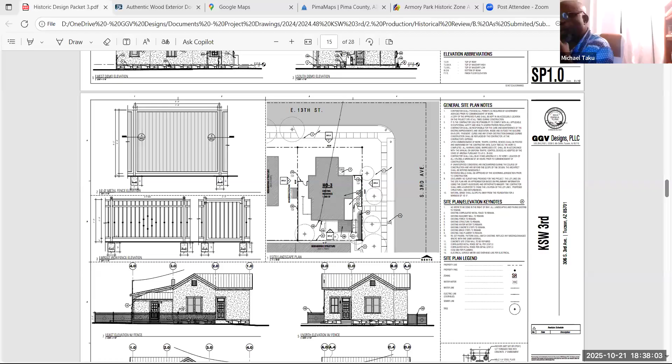You should be able to share your screen now, Jose. Let me see, okay, can everyone see my screen? It's coming. So I'd like to present myself again. My name is Jose Curtis. We will be presenting this project here on 306 South 3rd Avenue.

In our first review, the major things we had proposed, the major repairs involved a stucco retexture of the exterior. This is something we ran through Vint and Associates, and we received a stucco report from them. We also are planning on demolishing the asphalt shingles currently existing on this roof, and we're going to be replacing this with a standing seam metal roof.

We will be repairing and replacing doors and windows. We are replacing a chain fence. We're going to remove a dead tree that is at the back of the property.

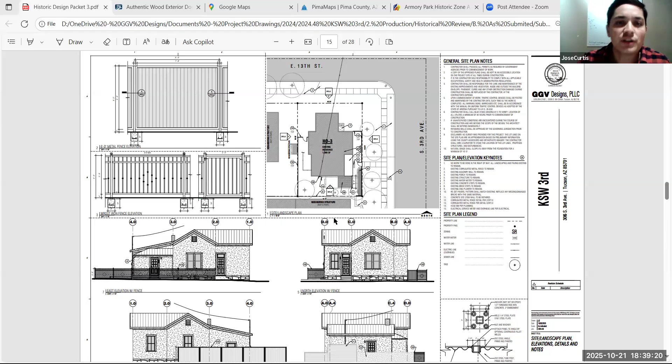All right, I'll continue. So we're repairing and replacing windows and doors. We're going to replace an existing chain link fence surrounding the property. And we're demolishing a non-conforming structure to the west of the property, to the southwest. So these are the major repairs.

As far as minor repairs, we're going to be adding a condensing unit to the back of the house, which will be the main cooling for the house. This will be behind a fence we're also proposing, which I'll touch on later. We're demolishing an existing water heater on the back of the property, along with some non-traditional electrical conduits. I think they were done after and aren't recorded anywhere, so we're going to be demolishing those.

It's currently in the works, but we're proposing to relocate the electrical service entrance. Right now it's to the east, on 3rd Ave. It's kind of entirely up to TEP, but we're going to be in contact with them to try and relocate that service to the back of the house.

The purpose of this meeting, as a continuation of the first, is to address some of the issues from the previous meeting. One of those major issues was the roof, so we're going to be replacing the existing shingles with a standing seam metal roof. We hadn't spec'd anything out previously.

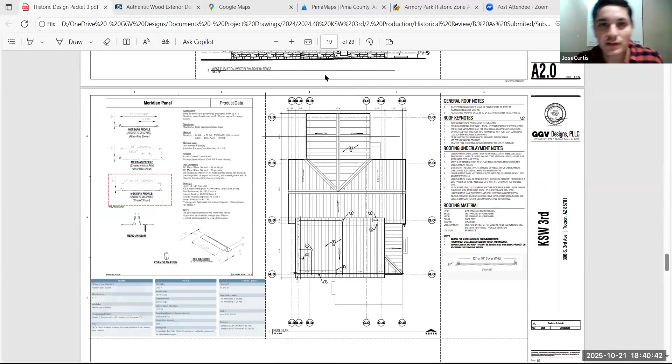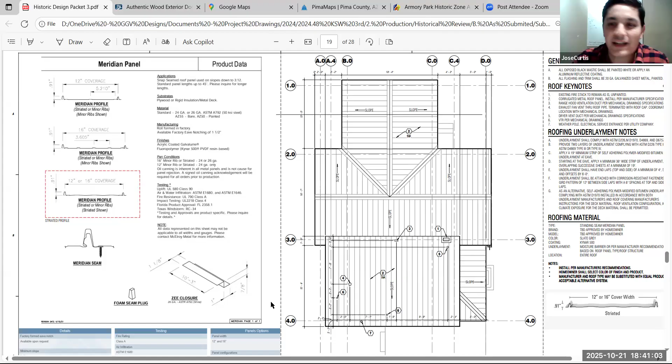Here in the spec, what we're spec'ing out is what we're calling a Meridian panel, acquired from McElroy Metal. One of the major concerns with the profile was that it shouldn't look commercial. So I drove around the neighborhood, and based on what I found, this is the style of roof - the striated panel.

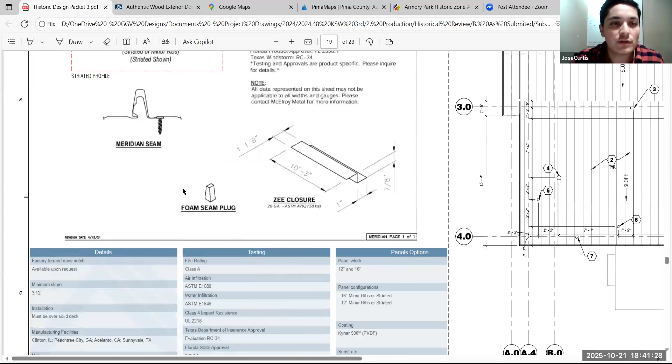So there's no ribs, the only thing giving this structure are the seams. Meridian does provide some with ribs, as you can see here, minor ribs, but we're not choosing that one. We're showing the striated.

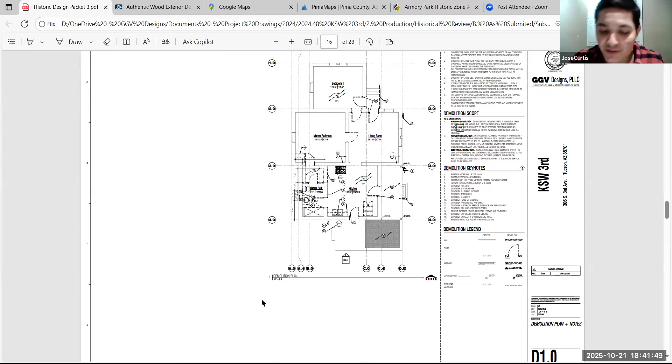Another major repair that was an issue before was the fence. The height we had used prior to this was in violation, so that fence was also going to be a violation. The fence we're proposing here will be on the north, east, and a small portion of the south. It's going to be a wrought iron fence, 4 feet high. A concern previously was that the corrugated metal fence we had proposed is not see-through on the street fronts, so we shifted to a more conventional wrought iron fence.

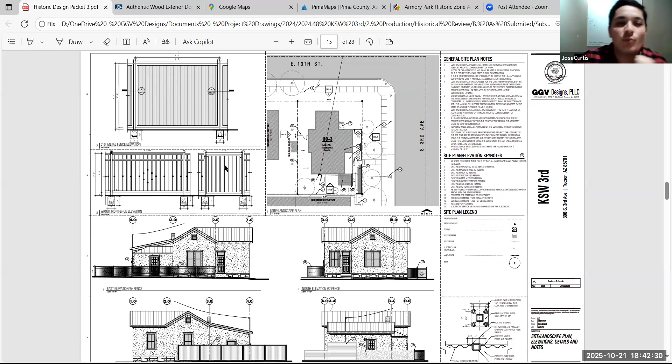As far as color goes, that's to be determined from the owner, but it might be a dark bronze. On the west end of the property, we're going to be doing a corrugated metal fence just for privacy. One comment we received was that we had the corrugations running horizontally, so we've changed that to be a vertical corrugated metal fence on a metal frame.

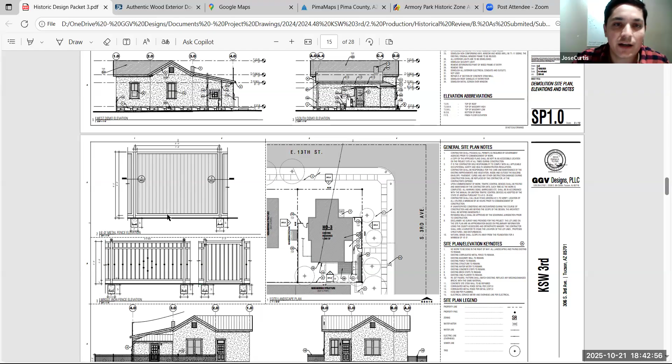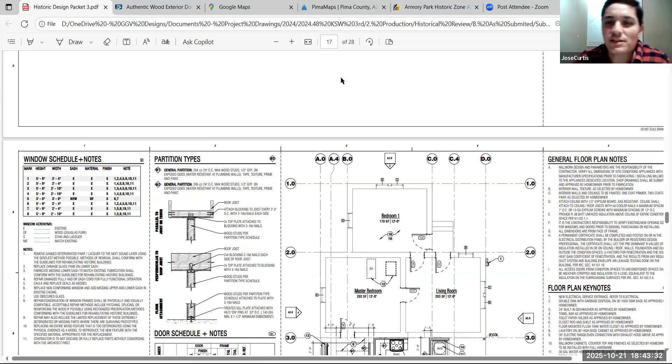Another issue we had prior was exactly how we were planning on restoring and/or replacing any windows. We didn't have much of a plan before. What we think is best is we're currently in the process of choosing a contractor that will be doing the renovation of the windows and doors. Our plan is to walk the site with this contractor.

If the board would allow it or agree, somebody from this board could also walk the site with us, and we would see each individual window - what is to be replaced, what's to be restored, what's to be fully reconstructed.

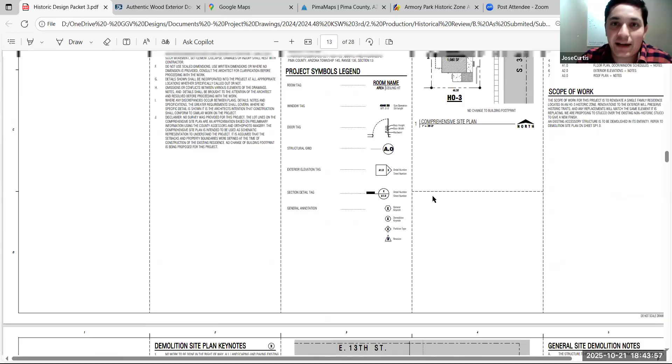The condition of these windows are pretty bad. I'll try and pull up some pictures. There's a lot of rot, a lot of things that probably won't be able to be salvaged.

But with help from the contractor and from the board, like this door back here, we can reconstruct a window sash and window frame, so that can be reviewed also prior to us doing any demolition of any of the windows.

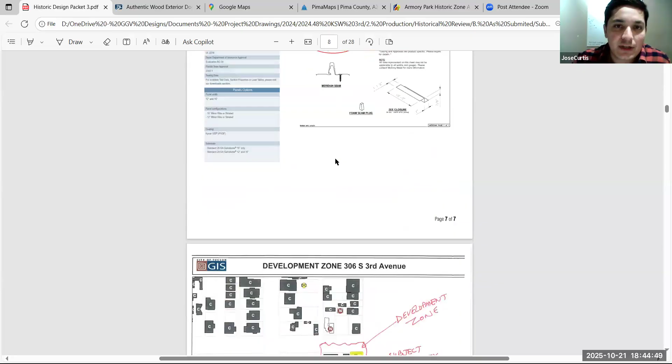The last thing I want to talk about was the doors. It was brought to our attention that these existing doors with the X panels are not traditional to the neighborhood. So we have proposed to demolish these and in their place have a more traditional door to the neighborhood, which I have called out here.

It is a JELD-WEN door, an authentic wood exterior JELD-WEN door, and it's something that I feel fits pretty well with the neighborhood.

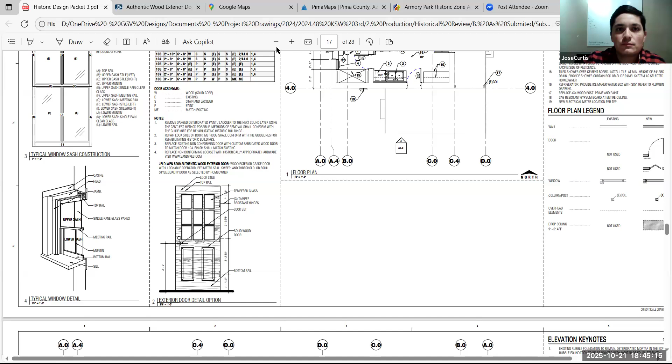That concludes my presentation. Thank you so much. Any questions and comments from the advisory board members?

Yes, I have a couple of questions. I think there's a little confusion on the doors and windows on the plan, but I think you clarified that in your statement, so I'll accept that in terms of what's being done. That basically indicates whether or not they're going to be restored or replaced.

When I went over to the site before the previous meeting, it appeared to me that a number of the doors and windows were in pretty bad shape and would be very difficult to restore. So I'm glad to hear that you're going to replace in kind if necessary. That remains to be taken care of.

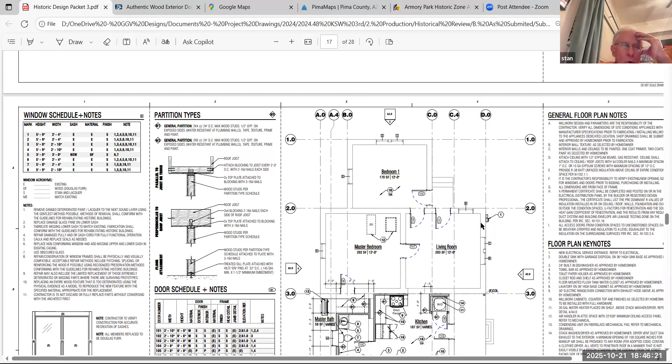On the window schedule on sheet A1.0, you show a 2/2 window. You've got both 1/1 and 2/2s, and on your new elevation plans, it appears that you're maintaining the window type in their original locations, whether single light 1/1 or 2/2 double hung. I think I'm happy with that, but your typical window sash detail shows a 2/2, implying that's going to be the standard window throughout.

But I'm assuming you'll maintain the single light 1/1 where it exists now, and the 2/2, as shown in the typical window sash, would be the window used where you've got a 2/2 window. Is that correct? Yes, that's correct.

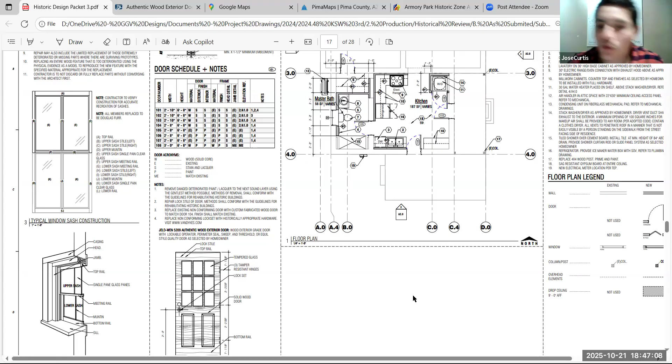That will be something that when we walk around, we will keep what is existing, if there is a 1/1 or a 2/2. The typical window detail we provided was meant to encompass both, so whether you'd do the 2/2 or 1/1, this detail applies to both. But you're correct, in our elevations we show it maintained as what is currently existing, and that's the plan.

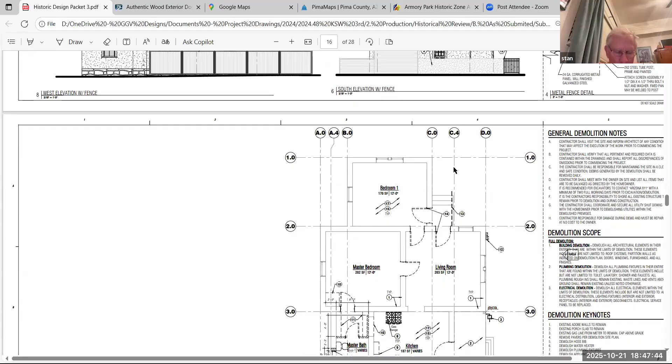Okay. And then on SP 2.0, south elevation, you're showing on the plans a corrugated fence that is in a horizontal position rather than a vertical position. Going through the drawing, just to the left of the main door, I'm assuming that's a corrugated fence, but it's horizontal rather than vertical.

Will that be vertical? This corrugated fence on note one here, this is existing. That's something the owner of the adjacent property put up sometime, we don't know when. But it is existing, so what we're showing is how it is out there right now. Okay, that isn't existing?

Is it on your property? It's right on the property line, so we're kind of in between on how to tackle it. But I think ultimately, as we now show it existing, whether we demolish it and redo it might be up to you guys. We're proposing to leave it existing.

All right. Well, if it's existing, I don't know that we can do much about that, but I did notice it was horizontal rather than vertical. And then you're also calling out for a mill finished galvanized steel for the corrugated. I know galvanized steel is used in different locations around the neighborhood. My preference would be a cold rolled steel, which naturally rusts and gives a warmer feeling, but I'll leave that to the rest of the board members. I would have that changed, but we can discuss that.

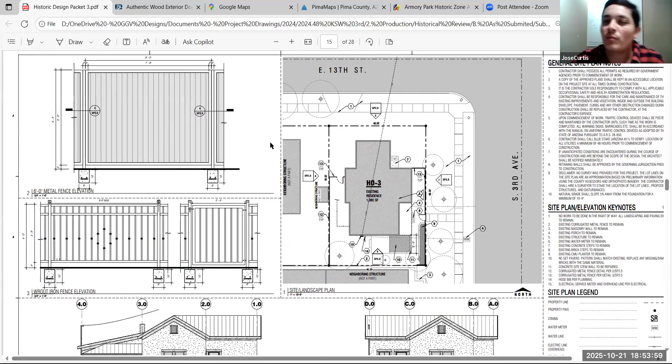Yes, so we chose the galvanized steel. We think that's easier to paint. And I think I did miss that point, but we will be painting this. And it will be the same color as the wrought iron fence, probably about a dark bronze. So there, it won't be reflective at all.

Okay, excellent. Then the second point is the detail of the posts that don't show the concrete coming to the surface, but just below the surface with a little bit of soil, decomposed granite, or other material to cover. Do you have a sense about that?

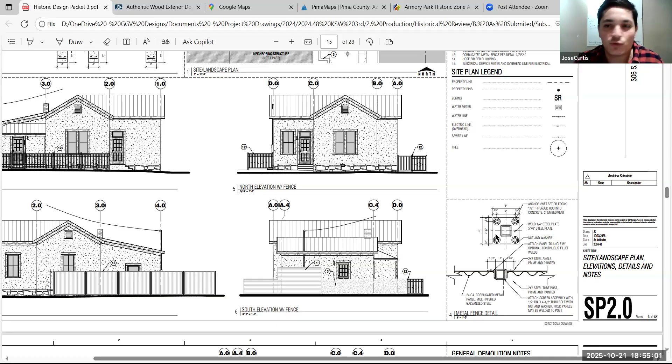Yeah, I'd like to give my piece on that. The reason we go typically on fences in this style, it's a lot easier for construction. When you set the posts in the concrete, what you essentially do is I think it becomes a custom fence that you have to build on site because the posts might not set perfectly at a 90-degree angle. And so I think as far as for what our client would like, it's a lot easier to fabricate the fence at a shop and then have it trucked or shipped and then do the anchor bolts than to have to fabricate it on site when you cold pour the post into the concrete. That's our take on it.

But we're willing to go with the second option. Could I comment on that? Yeah, I mean, sure. If you're fabricating them in the shop, that means that your post and your horizontals and your verticals are all welded together and they're ready to drop into place. So if you fabricate a fence, you can fabricate it in individual pieces or the entire length if you wanted to, bring it on the site, dig a hole after you got them on the site, and then just drop them in, pour the concrete, and you're done. That would work also. We could do that.

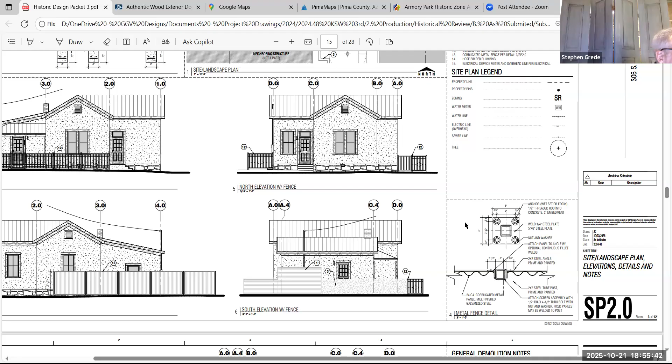So I'm also noticing that in detail 3, wrought iron fence elevation, the indication is that the concrete is below grade in that detail. Yes. Okay, so I think that how it is installed is less important than that you don't have all the concrete visible at the base of each post. Would you agree with that, Stan? Sure, you're right.

I missed that on the detail, which does actually show that the concrete is below finished grade. So if they want to do that, that's fine too.

Excellent, so then the last question is about the doors. Right now you have a 9-light door with an X panel, and what you're proposing is a 9-light with a 2-panel below. And again, it's a replacement door, so it doesn't have to match, since it's replacing something that's not a historic door currently.

I'm not sure whether the 2-panel or the 3-panel matters more—Stan, please clarify if you feel the 3-panel below is very important, or if it's the fact that instead of a 9-light, a single pane would be more historically appropriate. I know what we said last time was the 3-panel below, but do you have a sense of what would be most important to change?

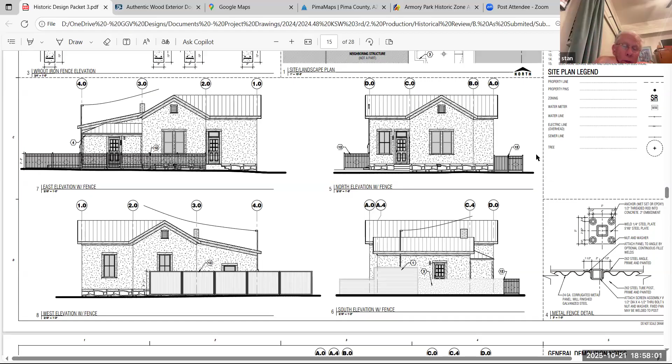I'm just looking at other doors in the neighborhood—a single light, or even a split light with 2 vertical panels, is something we have in the neighborhood in houses of that time. So Jose, have you been able to find any historic photos of the house that would indicate what doors were there historically? I have not.

The doors that exist there have been on as long as I can see—that's this one right here with the X panel. The reason I went with the door I chose was that just north of this property on Third Avenue, I found a building with a very similar door. Not exactly the same—it might exactly be a Jeld-Wen. That's why I went with that door.

But Jeld-Wen also makes a single light with a horizontal lower panel, so it's something that's very easily changed on the plan. This is just why I decided to go this route.

That makes perfect sense. So I think the Jeld-Wen has the 2-panel below—I don't think they have a 3 horizontal panel configuration, do they? I think they have a 2-panel and a single panel below. Okay.

Stan, do you have strong feelings about that? You know, I wouldn't strongly object to using the door he's got shown. I just felt a more appropriate door would have been the single smaller light with a 3-panel horizontal door. I find it hard to believe that's not something relatively standard—I'd think even Home Depot or Lowe's might have something like that. But I'm not going to make a stand on it. If the rest of the members are satisfied with that door, I'm willing to go with it.

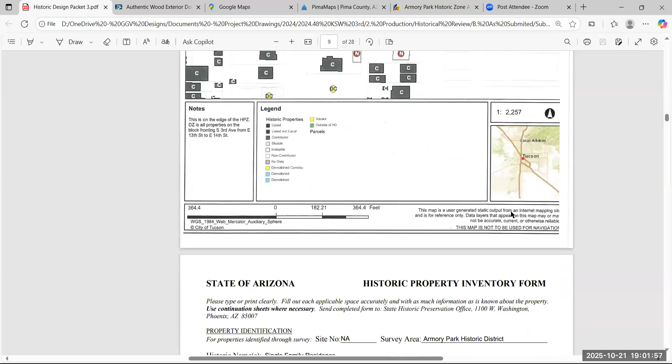Jose, I'm confused about the attic vents. On both sets of plans, it says the attic vents are to be demolished and then refinished. Can you explain what's going on with the 3 or 4 attic vents? So we're taking the same approach as the windows - some are rotted out. We're planning on replacing them in kind, repairing when we can, replacing if necessary. They're going to look the exact same after we're done - we'll take measurements and match it exactly.

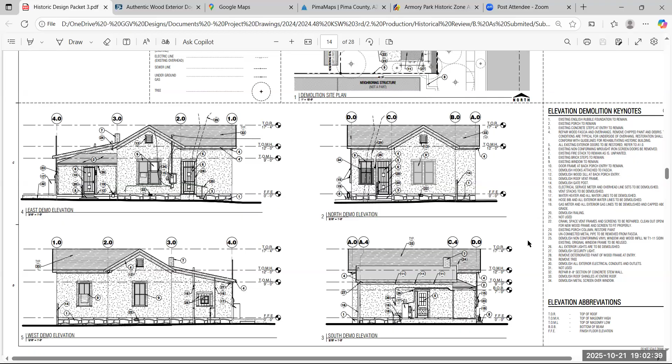The plans we got show a gas stove, but the gas meter is being removed. Then the page I caught for a half second shows an electric stove. What's the situation with the gas - is it going away? It had an existing gas line and it is going away, so everything's electric.

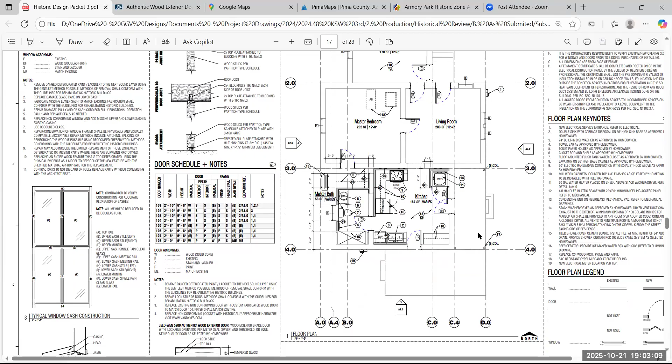I looked into the Meridian roof panels - they're made by McElroy Metals, and I'm surprised you were able to get them since there's no distributors in Arizona. But they do have painted versions and flat panel versions. The one I think you're indicating has some striation, but it's not that bad. The 12-inch would be more in keeping with the era of the building than the 16-inch. It's also a fairly complicated roof with multiple gables, so the smaller detail would look better. I thought the same.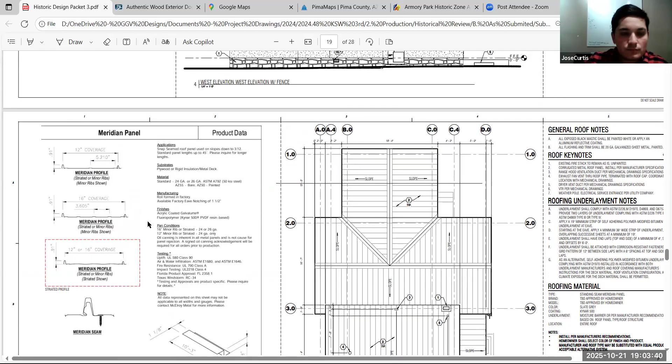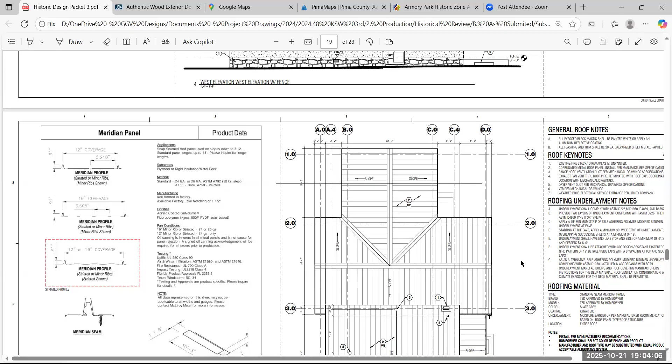You might want to go for their Kynar paint because it gives you a 40-year warranty instead of the 25-year Galvalume that just seasons with oil. Typically we approve matte or naturally rusting metals rather than shiny, whether it's corrugated or roofing. Again, I apologize for missing that, like on the fence, but we're planning on painting this as well. Color is to be determined, so it won't be shiny.

Okay, so I think that's it for me. If there are no other comments or questions, then perhaps a motion.

I guess I could make a motion if there's no comments, but before that, I would withdraw my requirement for the cold rolled steel rather than galvanized, so long as it's painted. But I would like you to note on the drawings that the tubular fence and the corrugated fence will be painted, and provide that color. You can make that a condition in the motion if you wish.

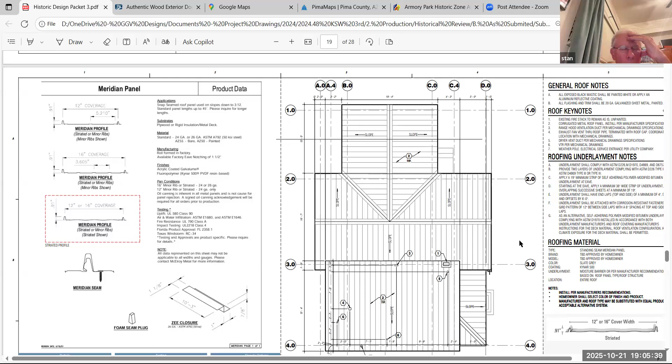I make a motion that the plans be approved as submitted with the understanding that the exposed fence will be painted, and that the exterior doors - our preference is a single light with a double or triple panel if it can be horizontal, but we would accept a double panel on those exterior doors. I think everything else was fairly well explained and accepted after Jose's explanation, so those would be the only two conditions I'd have.

Thank you, Stan. Do you have a second? I would second the motion. Marie seconds. Okay, any other discussion?

Then I'm going to call the vote. Helen Erickson - oh, I'm sorry, John Burr, you have your hand up, so you do have a question. Just a quickie - do you need to add a minor review to look at the actual windows on site? I think that was part of the proposal, and as soon as we're done with this, we can recommend who might be able to do that, Stan. Fine, I just didn't want to miss that.

Okay, so Helen Erickson has an aye. Maurice Roberts, aye. Stan Schuman, aye. Lynn Sutherland, aye. Steve Grede, aye.

So now that the motion has passed, we're looking for Stan - you traditionally do minor reviews. Would you be available to meet with Jose on site to look at the windows? Yes. Okay, thank you so much.

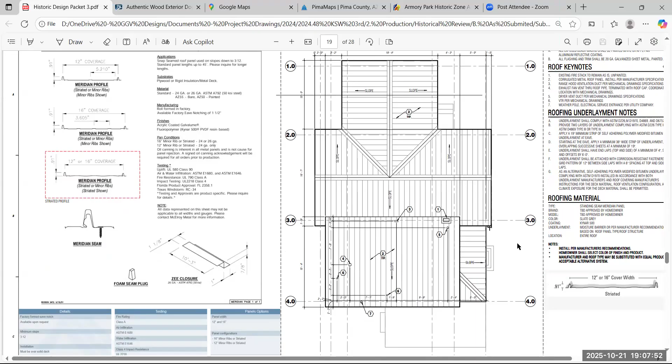Where's Gabe? He couldn't be here right now, he had an event. Okay, well say hi from us. All right, I will, and let him know we weren't hard on him.

I'll tell him you guys were hard on me, just so he might feel sorry for me. He'll rewatch this video, he told me, to see how I did. Well, you did very well.

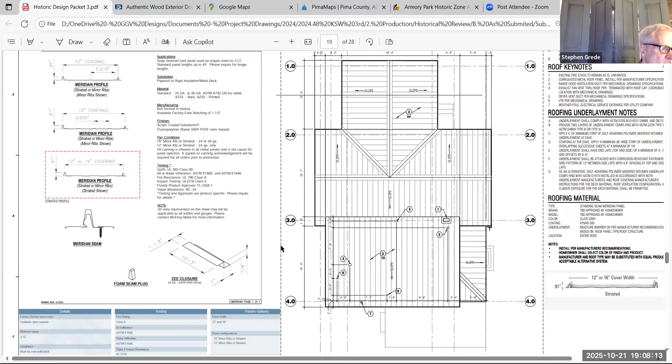Thank you. Okay, so I'd like to move on to the next item. SD-1025-00156, 702 South 3rd Avenue, construction of a new 446 square foot detached garage in the rear of the yard.

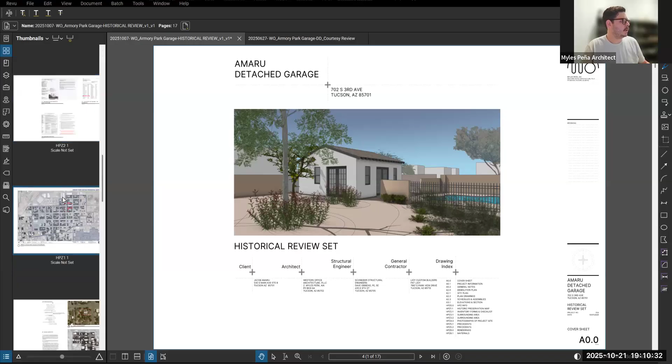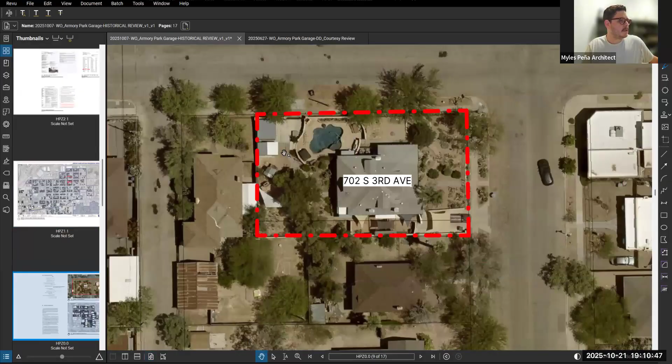So within the Armory Park Historic Residential District, we're here on South 3rd Avenue and 17th Street. The garage itself will be facing towards and fronting on 17th, not on 3rd. It's going in the back, kind of northwest corner of the property. You can see, just as a refresher, some of the existing structures that are in disrepair and going to be demolished in order to place this structure in. I think overall that'll be a nice improvement for the street.

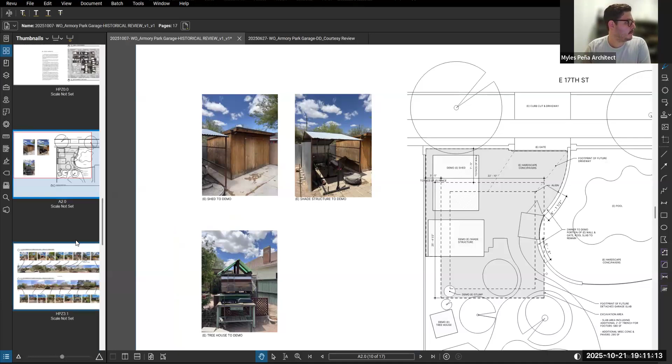Did a detailed study looking at the facades of the street frontages within the development zone, and presented those within the drawings here.

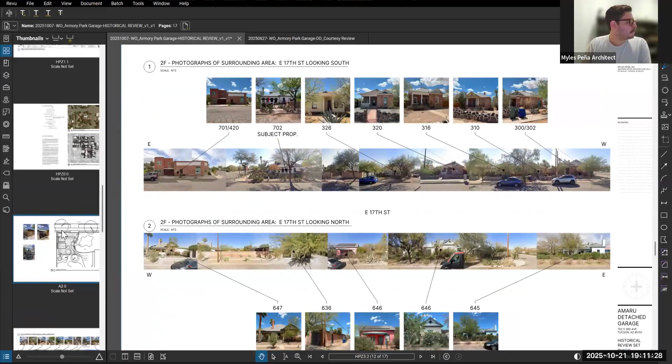So the changes since we last spoke - I missed in zoning that accessory structures like this need to be under 12 foot. It was 12.3 before; I did not get the comment, but when I was reviewing for another project I caught that and dropped it down that 3 inches.

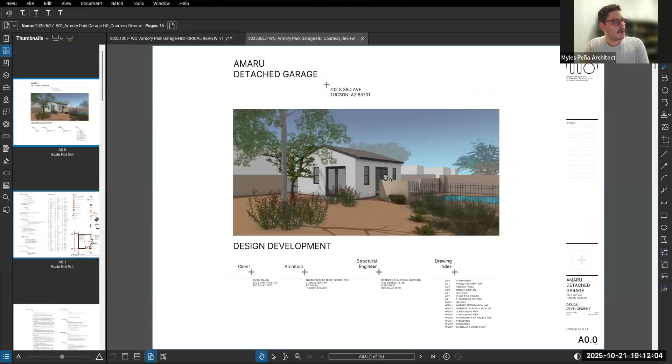The doors and windows have stayed in the same locations, but the main difference that has occurred was some discussion about the garage door and what that was meant to be like. In the previous iteration, the French doors here were just single light, and then there was a fairly minimal style steel door. The feedback was that maybe it was too dark to go with the white color to match the stucco, and looking around the neighborhood at what garage doors existed...

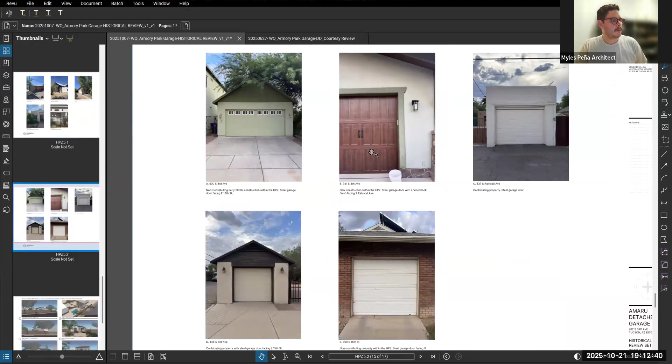Some of these are within the development zone, some outside of it. Other than historic existing wood doors, everything else is steel within the neighborhood. Even this newer project here on, or through, Railroad - you can see the garage door, but the address is 741 South 4th. It's a wood-look door, but that's still a steel door on that property.

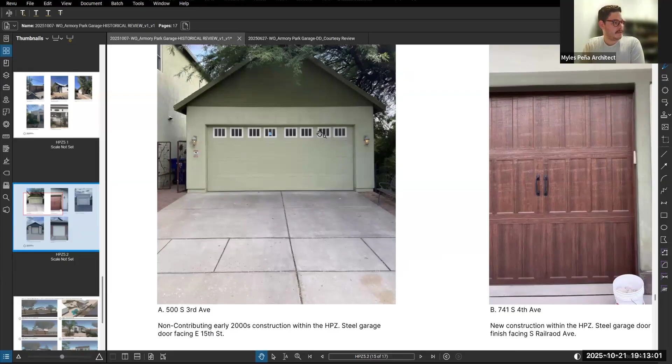And I ended up going with a model that was pretty similar to this newer construction on South Third, 500 South Third - a very similar type of panel breakdown that starts to mimic that look of wood a little bit, but would still remain steel in order to keep it operable by hand, as that's one aspect the owner does want.

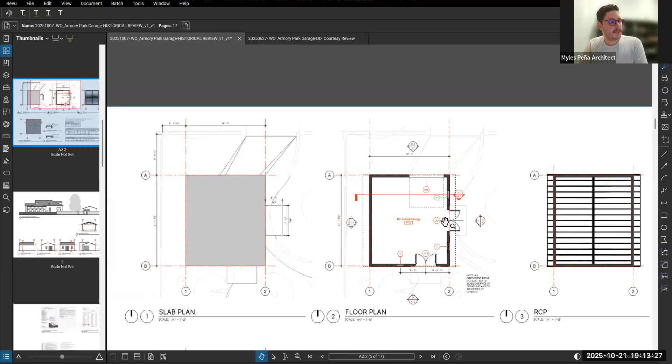The overall dimensions of everything else have remained the same - simple square footprint, 2 sets of French doors with the garage door that's offset, so it's about a 1.5 car garage. The main goal for this is to store the motorcycles he has on South Third Avenue - another improvement in terms of getting more vehicles off the street and having them within a private location here.

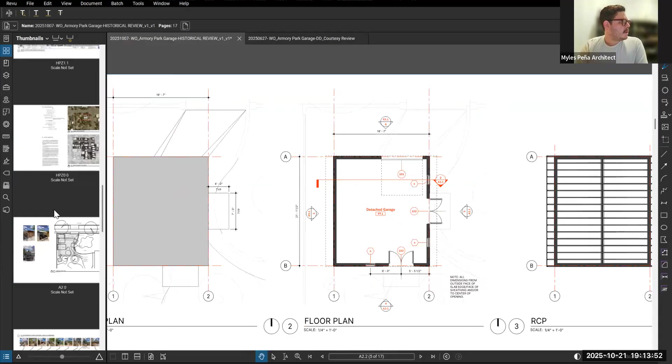The change that was hard to incorporate was moving away from the French doors. Being able to have that large opening to ventilate was a primary concern, especially because we're not adding any active or mechanical ventilation. There's a product under the eave that allows for ventilation that is not visible, and then a built-in ridge vent along the top ridge of the roof.

The suggestion was to consider a single door with 2 relights on the side. One issue is it goes from being about a $2,000 door to a $10,000 or $12,000 door. So the alternative would be to just go with a single door, but I think the design would suffer. Considering it's an accessory garage just meant to house motorcycles, the budget's not too large for custom sets of doors.

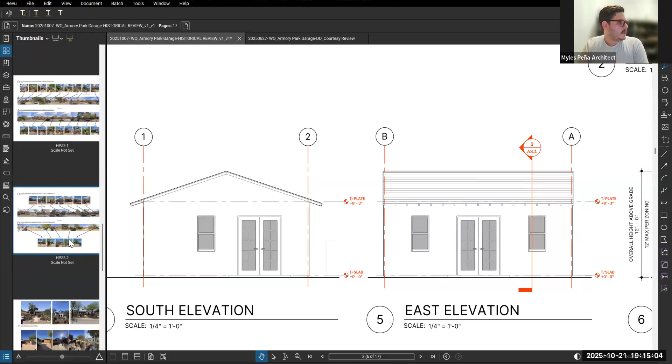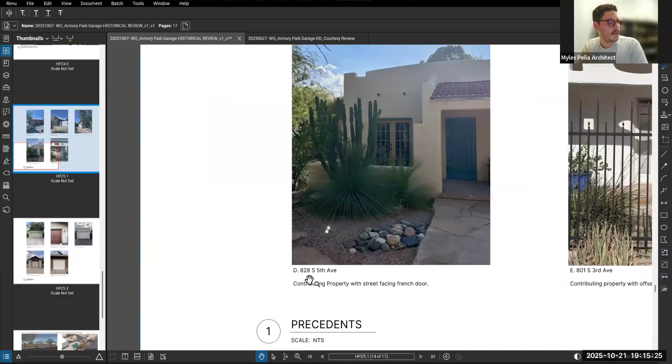In terms of precedents, there wasn't a ton, but there's some bad examples within the development zone. At 801 South Third, I'm assuming it's a narrower opening, but they have the split French door included there. I did see, outside the development zone but within Armory Park historic zone at 828 South 5th Avenue, an exterior street-facing French door.

So there is some precedent within the neighborhood for that. But I think largely the argument is that we don't want it to be confused for something historic, and none of those doors face towards the street front. So they're fairly private, and they'll be behind the existing wall that is there.

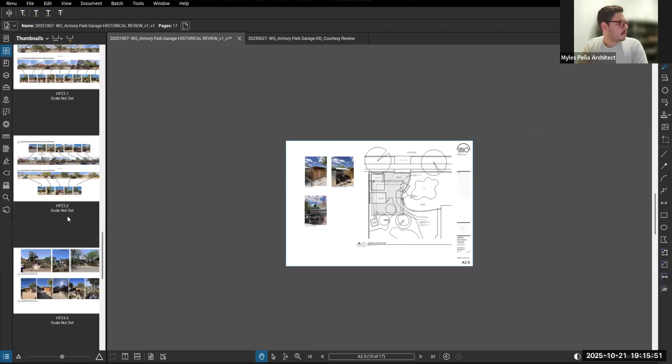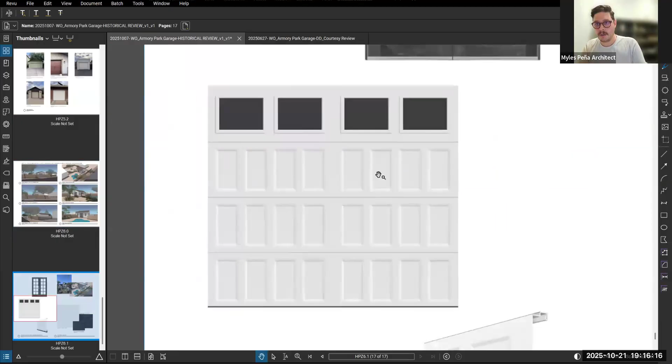If I can find that elevation again - so here you can see the updated renderings where the door is located. There's a little bit of a discrepancy between the renderings and the elevations, but it is a 10 light door that I found that is affordable for this project. And here is the elevation of that specific garage door. I thought both of these worked well.

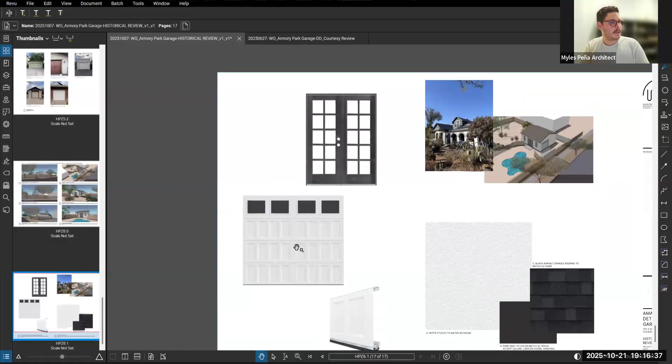The front doors on this house have a wood panel in the lower 4 portions, and then it's like a 6 light window above in the front door. Overall, I thought this approach to the garage door and the French doors did a good job of complementing the house and staying within the character of the neighborhood.

No other materials have changed. The stucco still matches the existing home, with an asphalt roof that matches the existing home.

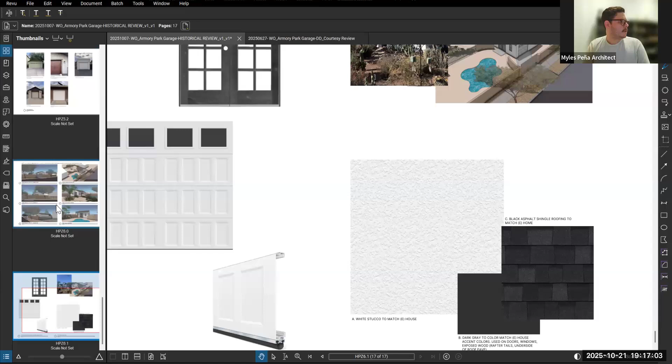Updated renderings - this is the existing wall and existing gate. This is the view. It's kind of a perforated metal gate that's there, so you do have some views from the street. This is an existing driveway and curb cut that's already there.

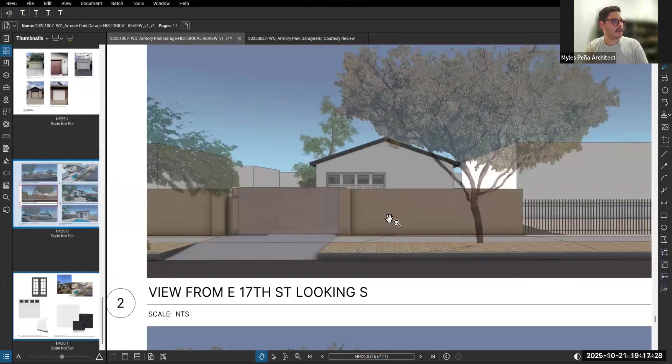You can see from the house, this is the view here, but from the street you predominantly see this elevation and about that much of the door. So I would argue that when you're passing by, whether it was a single door with the 2 sidelights that had mullions, or a double set of French doors, the visual is fairly comparable.

I was looking at it - if it was double the price for the doors, I think we would have been willing to move in that direction. But to spend the vast majority of the budget of this project on these 2 sets of doors was a big ask for us.

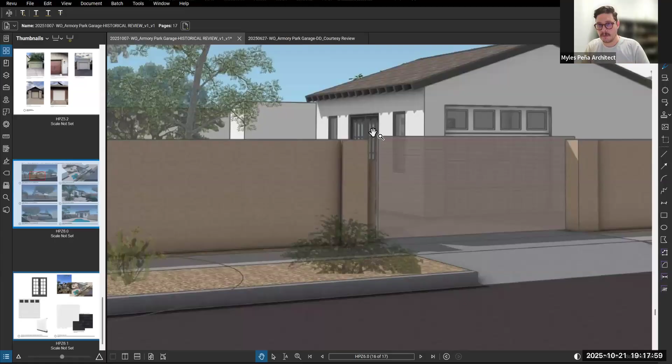Well, I guess I can go again, unless someone else would like to go first. Yeah, I have a question regarding those French doors. I understand you have a ventilation issue, and this is a garage, correct?

Correct. So instead of putting in some French doors, won't you put in some windows? We do have 3 windows in the building. There's not great light or ventilation because on the other side of the building, on the west side, the fence is right there.

But just thinking about the use case of if he's in there wanting to work on the motorcycle or something, it'd be nice to be able to open up those doors and the garage door and just have some fresh air. If you look at the surface area of the opening of those doors in terms of bang for buck, it's hard to compare. We'd have to add at least another 4 windows to start to match that same surface area.

So won't you have a window and a door, like a single door?

I mean, I want to increase the amount of openings because we do have 3 windows and then 2 sets of doors, including and then in addition the garage door. I'm very concerned about the fact that those French doors are visible from the street.

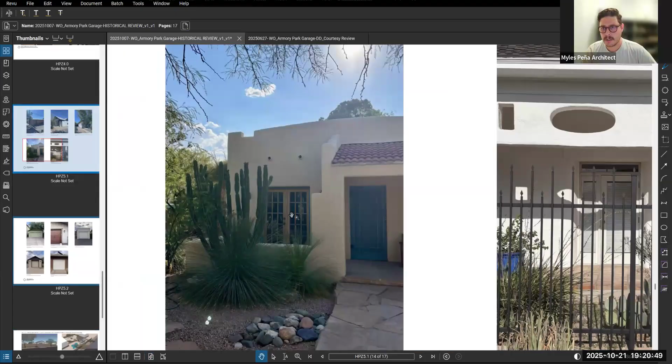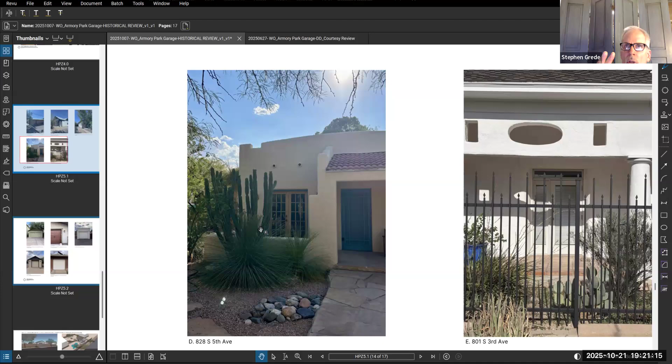It's a similar time frame to a lot of the projects, a lot of the houses in the Sam Hughes neighborhood, and pairs of French doors with multiple lights are historically appropriate in that situation. It's traditionally 1930s architecture. Now you are building something that is compatible, but this home is 1907. Yeah, but it's compatible, it doesn't need to specifically match the existing house, in my sense.

Okay, Stan. I think John had a question. No, I don't see John's hand up. I was just going to clarify.

There actually are a number of French doors in the neighborhood. The earliest are on Henry Trost houses, there are 7 of them. Most of them have sets of French doors, but they're scattered to the north in the neighborhood. So they exist from at least 1899 on, but they were somewhat typical for 1920s building, not so much in the Craftsman era, and then later in the 30s.

Lynn, I think you're unmuted again. I know, my cat walked over my keyboard, so I'm trying to figure out how to get back to you. Please disregard me.

Okay, Stan. I've got several questions, the first one may have been answered. Are you using this garage for motorcycle storage only? Correct. Okay, that would answer my question because that curved entrance in there looked like it would be a little difficult to get in with cars. So if it's just motorcycles, that takes care of that problem.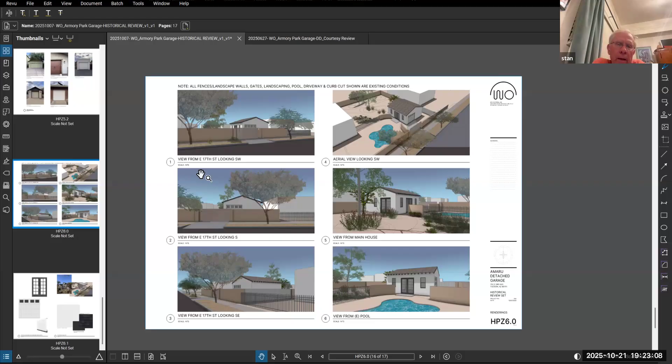Second comment I have is maybe not under our purview, but it looks like the pool enclosure security has been modified and would not meet code. Right, so the gap here in between the house, we're going to have to figure that out in construction to see where they can demo. They might be rebuilding that wall back, but the goal is to get that within 4 inches of the new construction on this side.

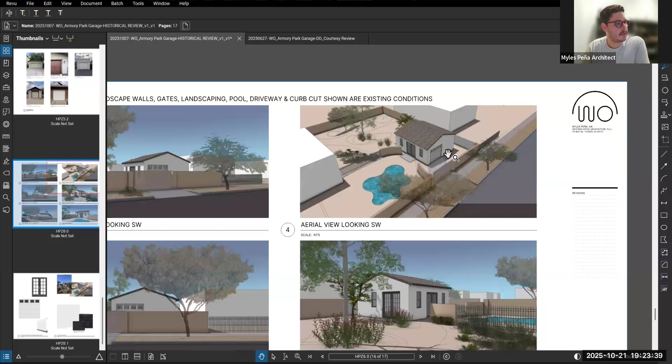It's not shown here because this would be something that the fabricator would produce shop drawings for, but there will be a gate here to prevent a child from being able to make their way into that pool area. Okay, I don't know if it's something we need to address, but I think it should show in the drawings because you're going to have to address that when you get to the city.

On your drawings, you call out Marvin Windows UW DH 3028. I looked that up and I could not find that designation. I'm assuming that is the Ultimate Wood Double Hung window. Correct, yes. So it's wood, but you don't give us anything in terms of the specification. There are 6 options in the specifications, you can go either with a pine or a hemlock window, and I think because it's exterior you don't want to go with pine. Correct, yeah.

That is something that I typically leave for the contractor to have more say. Once we see what the options are, that was kind of just to get us a starting point, because who knows what's going to be available when we start construction sometimes. But they are going to be painted to match the accent color, and yes, we would want to avoid pine for an exterior use.

Okay, I would be a little concerned about allowing a contractor to make final decisions on exterior materials. They still have to maintain the design intent for the neighborhood. So the pine windows, I would think, is cheaper than the hemlock, so he may say let's go with the pine. Yes, I typically have those submitted by the contractor and then reviewed by me personally. Okay.

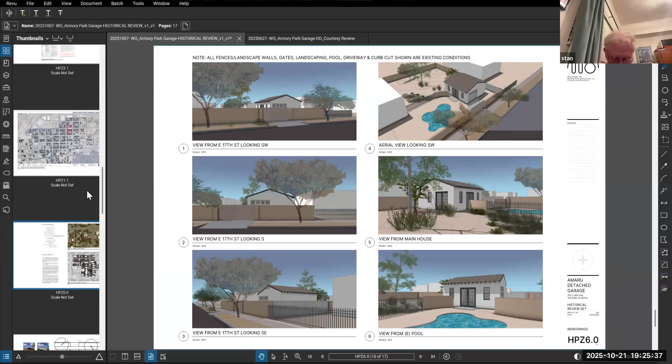The existing gate, I had a question on that, but when I went over to the site, it was obvious that was existing, so that was not an issue.

You've got some, obviously you don't have the full set of drawings here because you refer to structural drawings, but there's no structural drawings submitted with this, or electrical or plumbing. So there's no electrical, no plumbing, no mechanical?

No, there's no plans for any sort of mechanical. Any electrical would be a future scope of work, but as of right now, the owner does not want to proceed with any electrical within that space.

Well, if electric is going to be future, don't you want to put some underground conduit or something in there so you don't have to go overhead, or how are you handling the future electrical? I can understand maybe no mechanical and maybe no plumbing, but you're certainly going to need that.

So we're in discussions on that. We were potentially going to include in the foundation and a slab just a chase for electrical and maybe a future sink in that space if that was something he kind of wanted.

And so that would show up for the building permit to review as making future access easier. But otherwise, at this point, if he wants to proceed differently, then that'll be a different scope of work and he'll have to trench out as necessary.

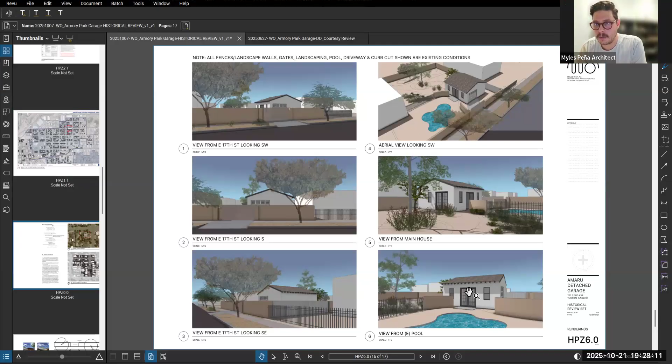Okay, so PT1 is just the standard white that is to be color matched to the existing home, and then PT2 is the accent gray that is color matched to the... Where, how do I know where the gray is? Is that the trim or what?

Yeah, basically the wood, pretty much everything that is wood, is gray. So does it say that on the drawings?

If you look at the window schedule and the door schedule here, so the door schedule calls out a factory white finish for the garage door, and then PT2, which is that gray. And then in the finish schedule, that's where PT1 and PT2 are keyed in.

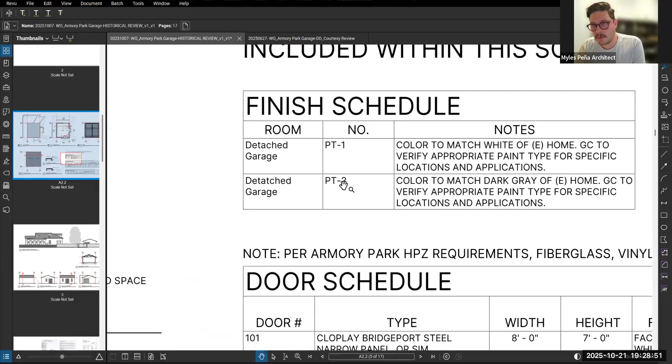Okay, I didn't see that. So, okay, you got that covered.

My final question is that you have an overhang on the east and west side, but you don't have an overhang, it's a flush condition on the elevation. There's no overhang at all.

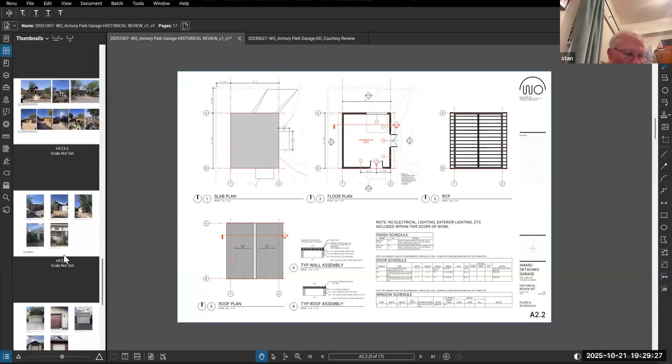Now, I've walked around the neighborhood and I just don't find that detail used anywhere, where you got a flush condition on one of the elevations of a house or a detached garage or anything. I found some that may have at least a minimum 6-inch overhang, it's very small, but that lack of overhang, there's really nothing there. It's something that's very unusual, you just don't find it in the neighborhood.

Sure, so that was kind of just largely part of the design in terms of the spacing of the trusses, at 16-inch, and that was kind of a design decision to go with because structural only required a 24-inch spacing. And so there's an extra truss in that system just to kind of have that detail of the exposed rafter tie and then a rafter tail.

And then in just keeping with the simplicity of the structure, those two tails on either end kind of die where the support ends. So there's no additional structure flying out to pick up, typically at the eave, that's done with outriggers.

Yeah, so I mean, we could get under 2 feet, but then, without any additional structure, I personally just find that finish edge flying out kind of loose to be unappealing. I guess I don't find it appropriate for the neighborhood.

I think that some type of shadow line, even a minimal amount, if it's 6 inches, extended out, that minimal amount would be acceptable. I just feel that a flush condition is really not an appropriate detail for the neighborhood, but let's listen to what everyone else has to say. Maybe they're willing to accept it.

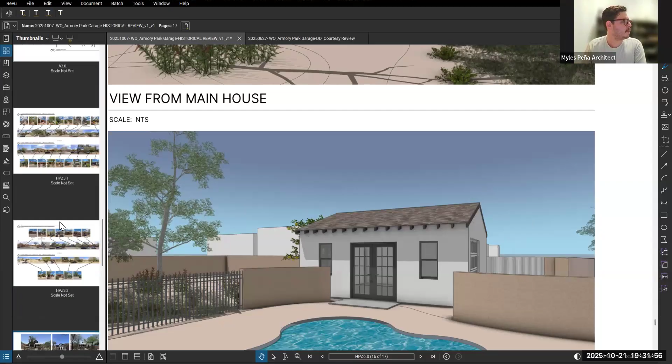Yeah, but I would call out for them to use a 1.5 inch member there. That's what's going to be used for the trusses, and that's kind of what I've shown and drawn in the elevations. Let me pull up the elevations here, but I understand the concern. I guess if it wasn't, that's one of the few things that's actually seen behind the wall. Correct. And yeah, you've got the north face, which is that flush wall, which has no overhang at all.

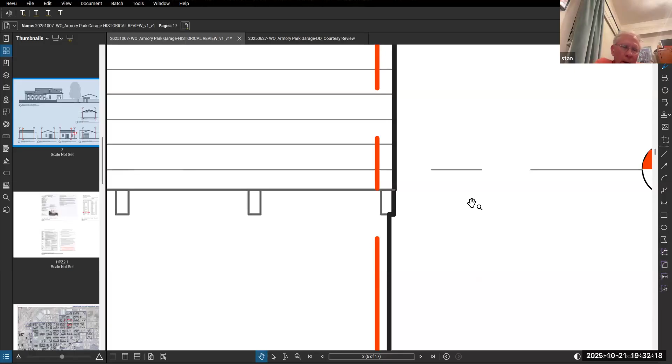I guess that's the only thing that really bothers me about the design. Okay, no, that's fair. I wish that had come up in the previous review. I didn't catch it then. So that's all I had. Thank you, Stan. Questions or comments?

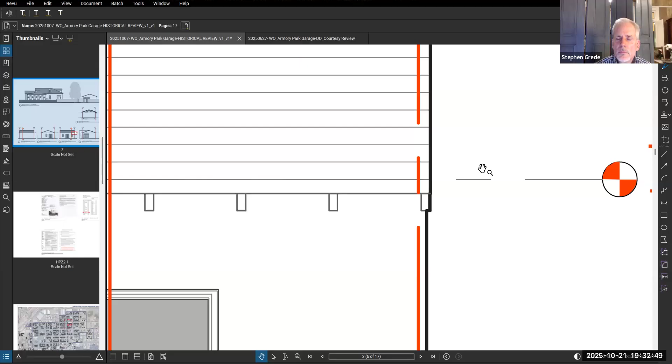I just wanted to share the same concern as Stan has regarding the overhang. That building does not look like the other buildings in the area. It looks different, I don't know, it just doesn't fit in. It's just a comment.

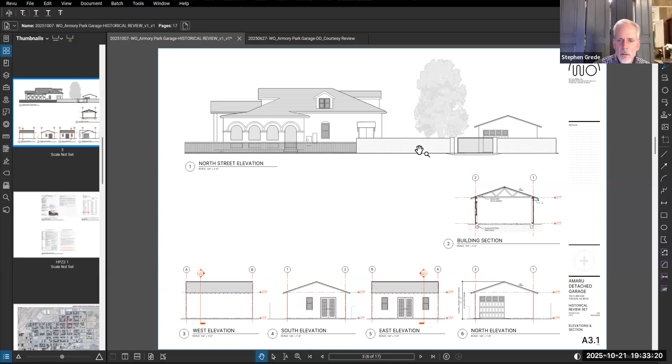Do we have a motion? John Burr, I just have a quickie. I would say an overhang would probably be more appropriate. The French doors look okay, and the garage door is reasonable on a new construction.

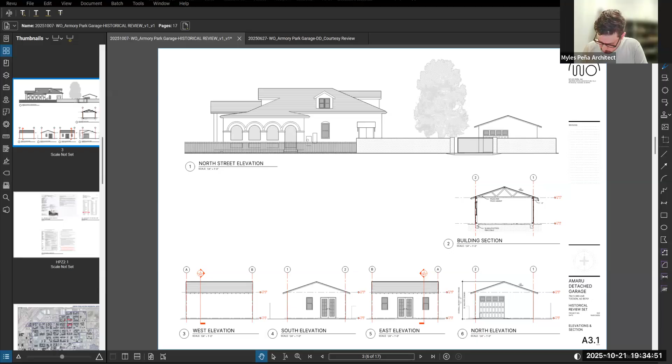No, there's no plans at the moment to touch or include this gate within the scope of this project. So the street view here with the perforated look, kind of seeing that steel structure beyond, is what's there currently. All right, and your roofing says black shingles, but the ones that went on the house in February, March this year look like dark gray. Is that actually the fact? That is, so I will update that. Thank you, John. Yep, that's it.

One quick question I would just like to know. It seems like there's still a little bit of maybe some people are on the fence with the doors, but the overhang, extending this out a foot would be a very easy thing to do and to incorporate, and I'm on board for doing that. So I guess the initial review time was over 4 weeks to get in for this meeting, and we started back in July. So I'm just curious if this is something that I could get approved with a guarantee of changes of including that overhang on those two sides, or if this will have to go through review to have that looked at for that detail.

Thank you. Thank you. It depends on the motion. So if we have a motion, we can make the motion contingent upon a change that you have agreed to make. Okay.

Hi, I don't know how to make my hand go up, but that's okay. This is Lynn. I would like to make a motion that we approve the plans with the overhang of 6 to 12 inches over the two sides that are currently seen as flush, that the French doors and the garage doors be accepted as they are, that the roof color be changed to dark gray to match the main house rather than the black as currently stated, and that's my motion.

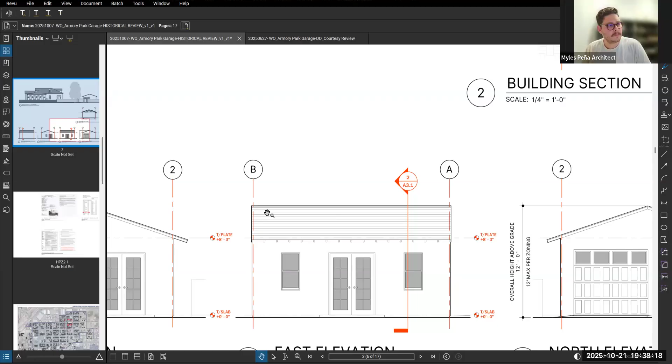And Myles, thank you for your presentation and thought on this project. Yes, thank you for your time. Okay, so Mr. Chair, who did not vote? Maurice? Maurice is the no vote.

Okay, so item 5 is minor reviews. I've got one issue I'd like to discuss. Please. I was asked to take a look at

330 East 13th Street. That's Luis and Martha's residence. They're doing a porch on the back of it. It's a minor addition. And they asked whether or not I would consider that as a minor review, and I would have to say yes, I would. I went over there this afternoon and talked to both of them and took a look at what was being done. There is nothing that can be seen from the alley, the street, or from any other location, because the entire backyard is either blocked by two other structures or a tall fence.

It's my understanding that they were asked to make it a major review. And just a simple porch covering on the back of the porch, I did not see as being required to be a major review. I'm asking whether or not, Michael, we can change that, because I guess you've asked them to submit for a major review. I'm asking you whether or not we can consider that a minor review.